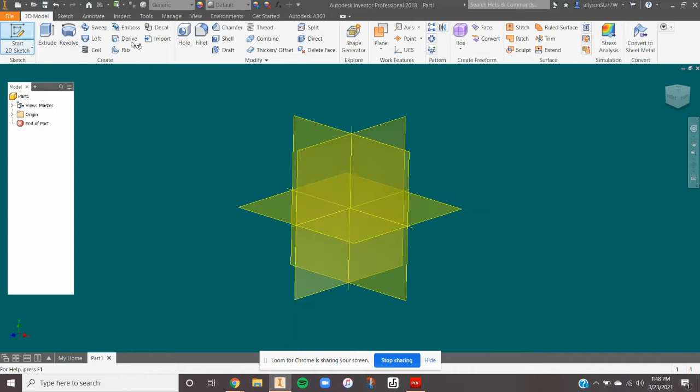So we're here, we're in Inventor, we're in our part. We're going to start a new 2D sketch on the XY plane. And if we look at our dimension, we're going to sketch a rectangle that is 6 by 9. 3, 6, 9. So we're going to start by using our 2-point rectangle.

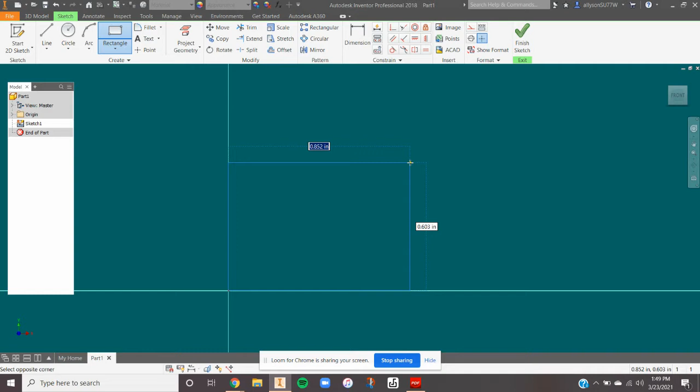And we're going to start at our point of origin. And we know that because our cursor is going to change a color. It's going to change to green. Okay, so we need this to be 9 inches wide by 6 inches tall. Okay.

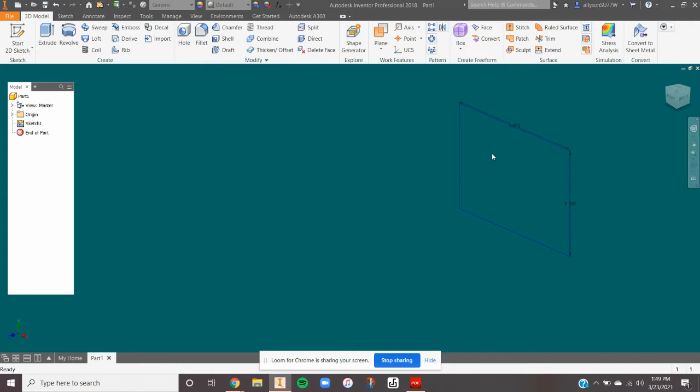Let's go back to Inventor. We finished our sketch. We're going to come to extrude. And because there is only one sketch on the screen, it's the only thing that's going to extrude. We're going to extrude it 1 inch. We're going to turn this around because we're going to do another sketch.

Okay, so now that I have my rectangle, I'm going to use the dimension to make sure that this is centered. And I'm going to dimension all around. Hit dimension. I'm going to hit my top line and the top line in my smaller rectangle, and I'm going to make that 0.5. And I'm going to use this dimension all around this rectangle so that it looks like my picture.

You're going to hear me say a lot that you want to make your sketches look like the picture that they give you. It's a good way for you to check to make sure that everything that you need in your sketch is there. It's also a good way for you to check if you're missing something.

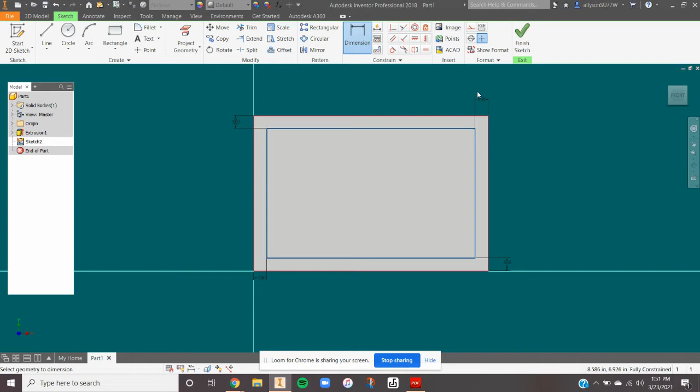Okay, so now that we have our rectangle, it's dimensioned 1/2 inch all the way around. We're going to finish this sketch. We're going to come to extrude. We're going to click the rectangle that we just created, but instead of joining it, we're going to cut it, and we're going to cut it 0.5. So we can come in here and change that distance to 0.5.

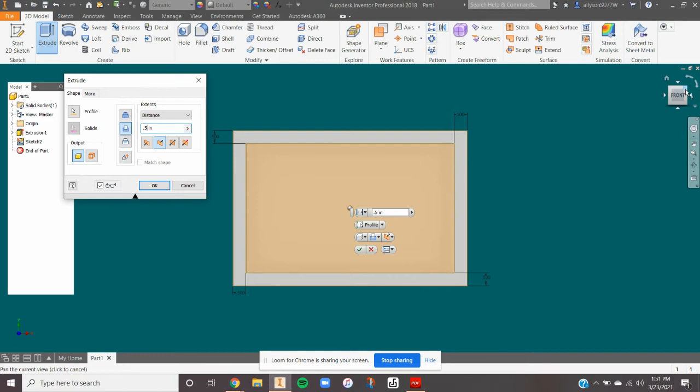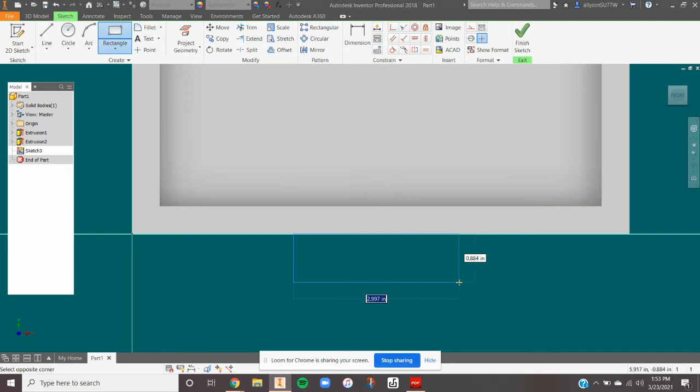We're going to come with our 2-point rectangle, and I'm going to zoom in. Notice when my cursor hits the line, it changes a color. So we need this to be 3 inches wide and 1 inch tall.

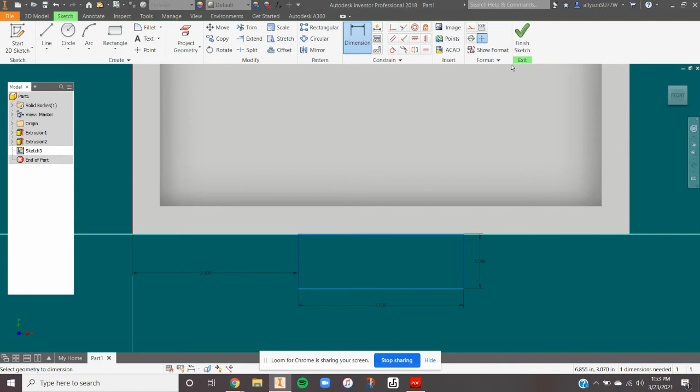Okay. So now that we have our rectangle here, we need to center it. So we're going to use our dimension tool, and we're going to look at the outside edge of the case and the outside edge of this rectangle. And we need this distance to be 3 inches. And so now this is centered, and we're going to finish the sketch.

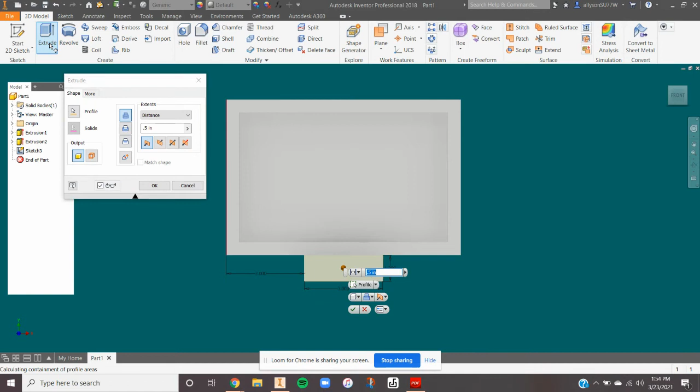Okay, so now that we finished the sketch, let's look at the information here. So if you look at the picture, you can see that this handle does not go all the way to the base of the case. So we're going to make this extrusion 0.5. So we finished the sketch. We're going to click extrude. And again, it's the only sketch that we have, the new sketch.

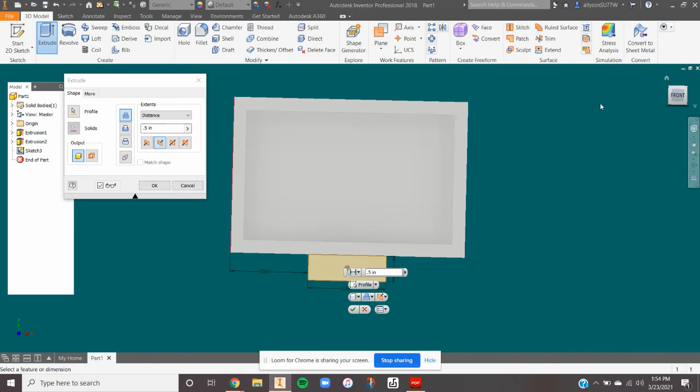What we want to do is change the direction. If you look here, if we were to create this sketch, that handle will be floating above the case, and we want it to go into the case. So we're going to change the direction. Notice when I change the direction, the extrusion goes inside or downward toward the case. And by default, it's going to leave the last dimension that we had in here. So it's going to be 0.5. And we're going to click OK.

So we're almost done. We have this rectangular case and this beginning part of a handle. So if we were to come back, we have this last part, this cutout. We know this cutout here is going to be 2 inches wide. And if the total distance for our outer rectangle is 1 inch, then the height for the second rectangle is only going to be 0.5 inches. And they tell us that here with this dimension. So we're going to make another rectangle that's 2 inches wide and 0.5 inches tall.

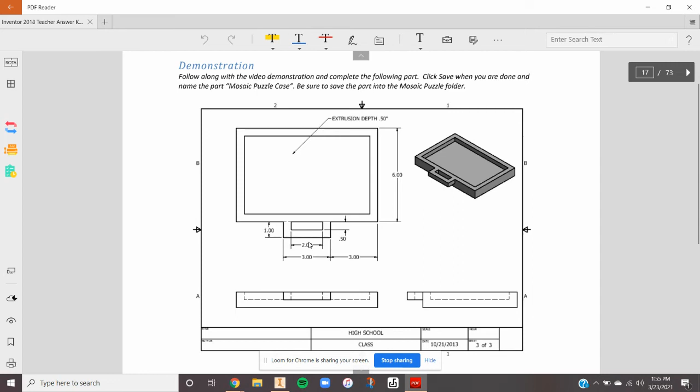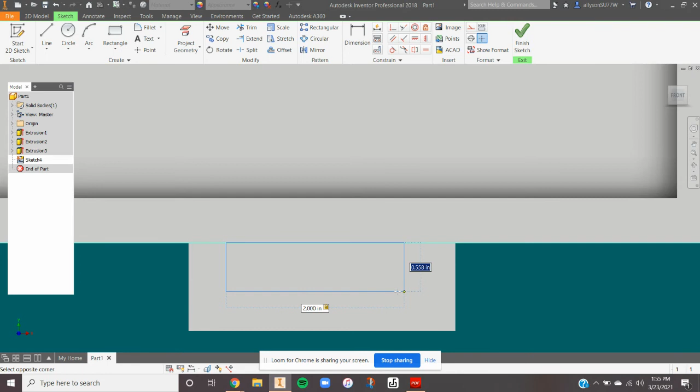So again, we want to make sure we're going to start a new 2D sketch, but on the rectangle that we just created. We're going to come here to a 2-point rectangle. We're going to touch this line, and we know we need this 2 inches by 0.5. Okay, so that rectangle looks good. We need to now center it, and it's going to be 0.5 inches all around.

So let's go back in and use our dimension tool. Now notice I created my second rectangle on the same line that I started the larger rectangle. So we're going to come here to dimension, and now we're only going to dimension 3 sides. We need this to be 0.5. And we need this bottom to be 0.5. By default, this should also be 0.5, but let's go ahead and put a dimension.

It is there. Now notice what will happen if I try to dimension it. It's going to say it's overly constrained. The reason is the computer can do some basic math. So it knows that if the width of this larger rectangle is 3 and the smaller rectangle is 2, and I dimension one side to 0.5, which is a 1/2 inch. If I have a 1/2 inch on both sides, that's 1 inch, plus the 2 inches of the smaller rectangle, it adds up to 3 inches. And so the computer already knows that, so it won't let you put that extra dimension in.

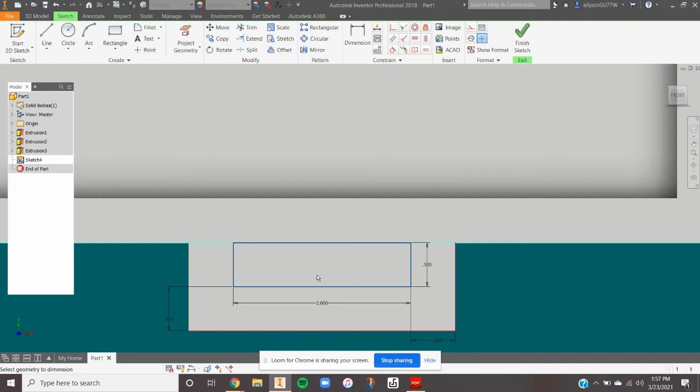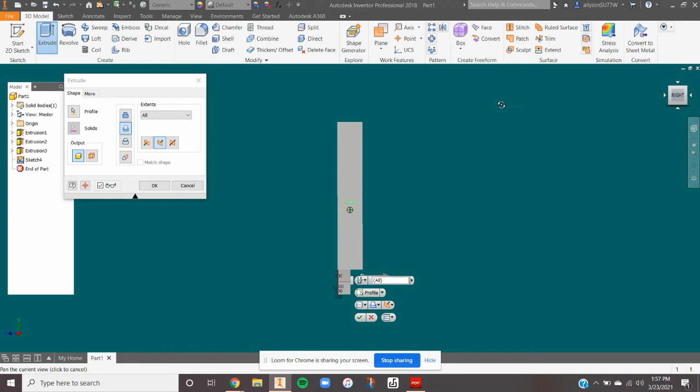So now we're going to finish the sketch. We're going to come to extrude. We need to select the rectangle that we just created, and we want to cut it. But we want to change the distance to all. And the reason we're going to do that is if we were to ever change the dimensions of the case, we want the handle or the cutout to always go all the way through. We're going to select OK. Hit front.

We can use our view cube to check everything. And if we hit home, we're going to get a nice view of our case. So this is the case, very basic. It's literally using 4 separate rectangles and your dimension tool.